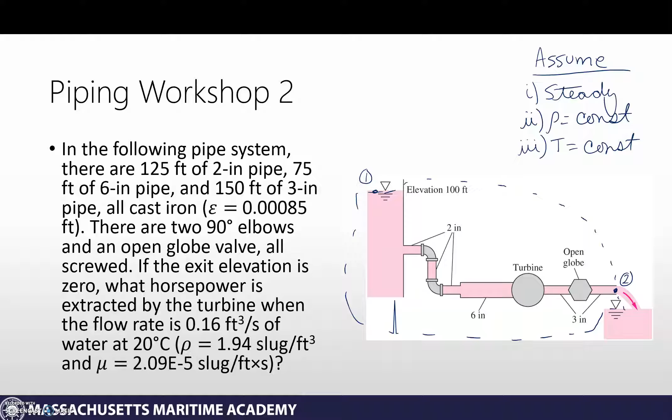The only information we have is about the exit; they tell us the entrance is above the exit by a certain height, an elevation of 100 feet. So we're going to take our output right at the exit, right as the fluid is leaving the pipe, which means it'll be at atmospheric pressure, but we do have some velocity there because that's the information that we know.

So no pump, pressures are equal, no velocity at point 1. This is what our final equation is going to be. And so we rearrange it for the turbine. The head of the turbine is going to be Z in minus Z out, minus the sum of all of the total frictional losses, minus V squared out over 2g.

So 3 pipes, 3 different sets of losses. For each pipe, we're going to calculate out epsilon over D, calculate out Reynolds number, calculate out friction factor, and solve the Darcy-Weisbach equation for each individual pipe.

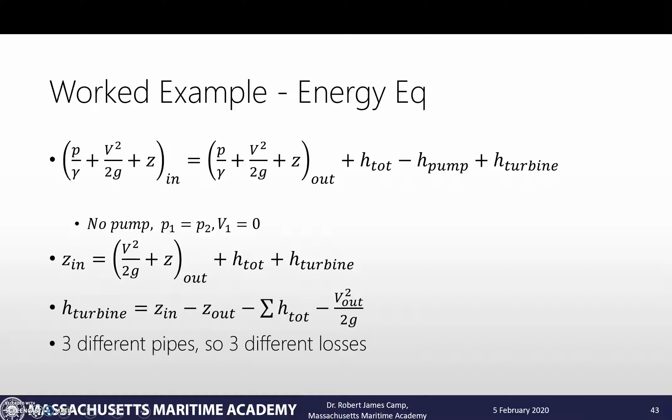So as we look at the first one, the 2-inch pipe, we'll call A, epsilon over D, we'll find to be 0.0051. I have L over D here just to make the Weisbach equation a little bit easier, so that's going to be 750. We can calculate out velocity to be 7.33. So throughout everything with the 2-inch pipe, we're going to be calculating out based on a velocity of 7.33. Once we go to the next size, then we calculate it using that.

So if we calculate that out, that's a Reynolds number of 1.13 times 10 to the fifth, which is a very turbulent flow. So now if we go to the Moody chart, the first thing we do is we find that 0.005 line, which will be right in between these two here. And then I have to find 1.13 times 10 to the fifth. So here's our 10 to the fifth. So it's roughly right in there. And so what we're going to do is we're just going to follow that over.

Pause this for a second. And the reason I pause that is since I did not write the epsilon over d here, it's actually 0.005. So we're looking right about in there. So if we follow that out, we should be getting a Darcy friction factor of about 0.03. In fact, if you use the equation, it's going to be 0.0314.

So from there, we're going to look at the second pipe, the 6-inch pipe. It's the same kind of pipe, but different diameter, so our epsilon over d changes to 0.0017. There's our L over d. We'll calculate out the velocity. Much bigger pipe, so it should go slower. So our velocity is 0.82. We calculate out our Reynolds number here, and our Reynolds number will be 3.8 times 10 to the 4. Once again, very turbulent flow.

So if I look at my Moody chart, and I actually pull up the correct epsilon over d this time, which is going to be 0.0017, so somewhere right in about there. And then we're going to look at our Reynolds number of 3.8 times 10 to the 4, so it's almost 4, so it's going to be right about that line there. And we look at where those two cross. So this one comes over here, kind of sketching in between. We read it over on the left. We'll find that our Moody friction factor is about 0.0266.

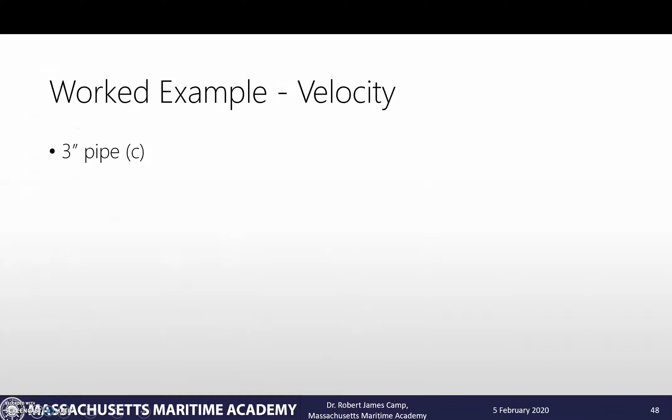Finally, we go look at our 3-inch pipe. This is our discharge pipe. Epsilon over d changes, so 0.0034. We have a velocity of 3.26. This velocity is important because this is also our velocity out. So we're going to be using that in our main energy equation. Reynolds number, you'll calculate it out to be 75,600.

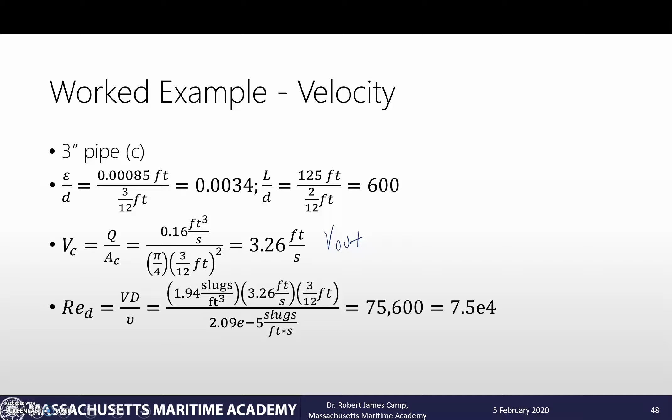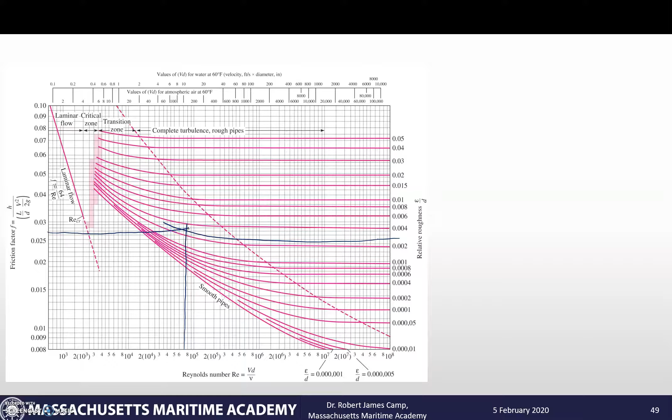So if we go to the Moody chart here and look for 0.0034, we're sitting right about there. And then if we're looking at 75,000, so 7.5 times 10 to the 4th will be right in there. And once again, we just look where those two cross. We sketch this out here. Crosses about right there, which gives us a Darcy friction factor of around 0.0287.

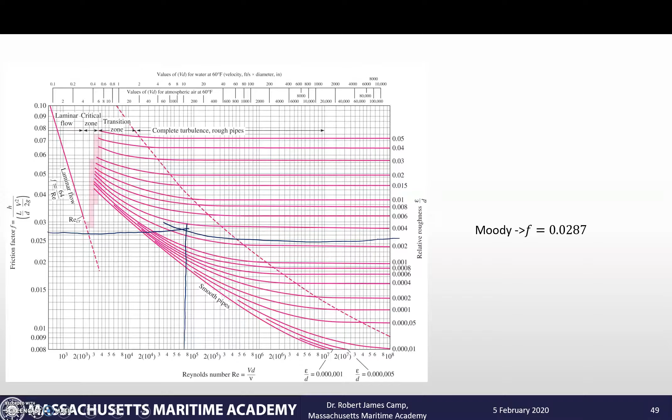So now we're going to start looking at our minor losses. Now we've got a couple different minor losses. We have minor losses that are different for each pipe. So we take the minor losses from the pipes that we're using, just like we take the velocity from the pipe that we're using. So the first thing that we need to look at is we have a sharp entrance. And so for that 2-inch pipe, we know that that sharp entrance is going to be 0.5. Sharp entrances are always 0.5, exits are always 1.

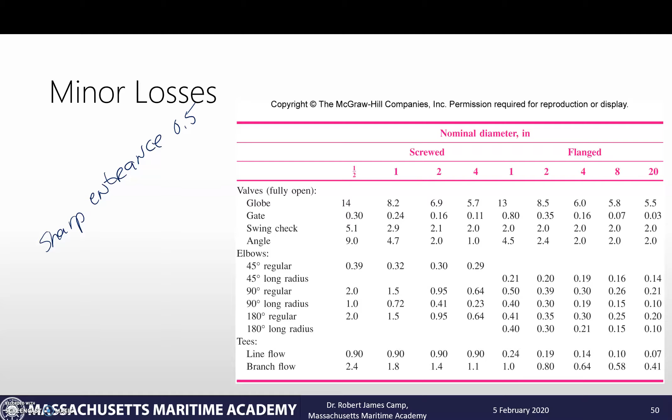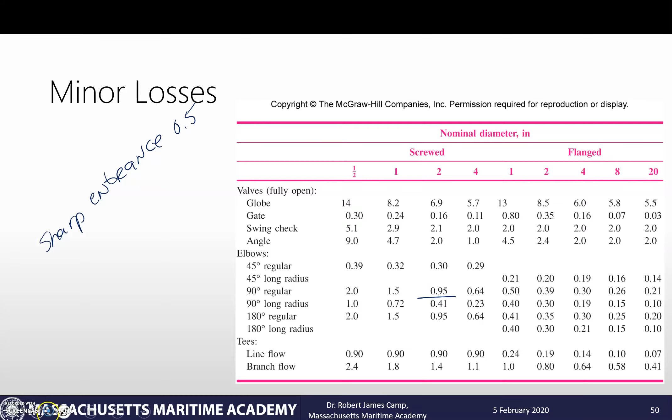And then we have two 90-degree elbows that are threaded. So as I take a look at this, that first pipe is a 2-inch pipe. So 2-inch 90-degree elbow, so we'll have 2 at 0.95. And then we'll come back to this one here, but we have a sudden expansion. So we can either use the equation or we can go to our sudden expansion chart.